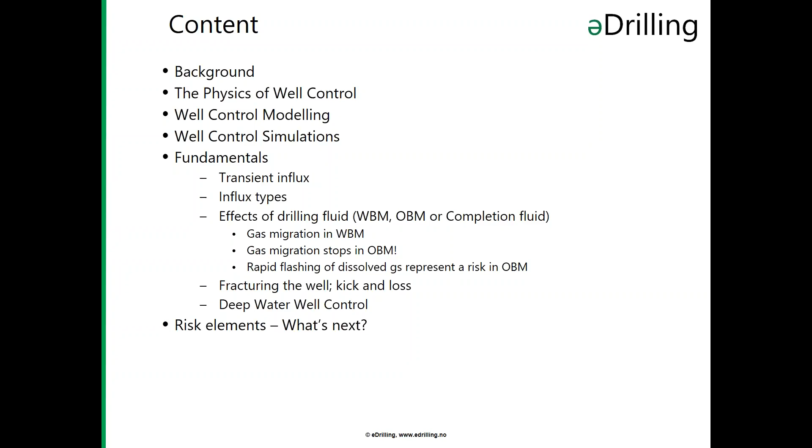As a background to this webinar, here we can see the technology knowledge which is inherent in our company and in the personnel working here. We've been involved in well control since 1983, with a focus on gas kick development to understand, describe and model this. There was also a specific focus on kick development in oil-based muds.

The industry has also had a high focus on this, and a number of joint industry projects were organized to focus on and understand kick developments, with a lot of full-scale well experiments performed. I'll mention some of these here.

In 1989 there was a JIP to focus on kick developments in inclined and vertical well experiments, gas migration and control in these. In 1991 there was another JIP focused on drilling high pressure, high temperature wells, and field tests both in oil-based and water-based mud were performed in the North Sea with focus on well hydraulics, temperature development and pressure control.

Extended reach wells were studied in large-scale kick experiments in a large-scale surface well, or flow loop, in 1995. In 1998 there was a JIP focusing on development of underbalanced drilling.

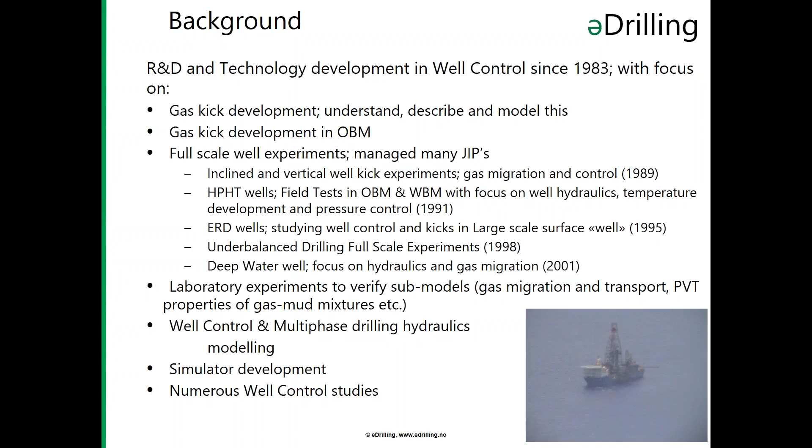I'll give a brief overview of the flow hydraulics model which is utilized. This is an advanced transient single and two-phase hydraulics model, which is coupled to a transient two-dimensional temperature model. By means of this model, it's possible today to focus on the challenges in drilling, completion, well intervention and production operation related to hydraulics and well control.

It's possible to perform integrated design of operations. This modeling has also been linked to advanced training simulators, and it's also integrated with real-time systems, making it possible to perform post-analysis. The model is designed to be very flexible, robust and fast, and can handle complex situations.

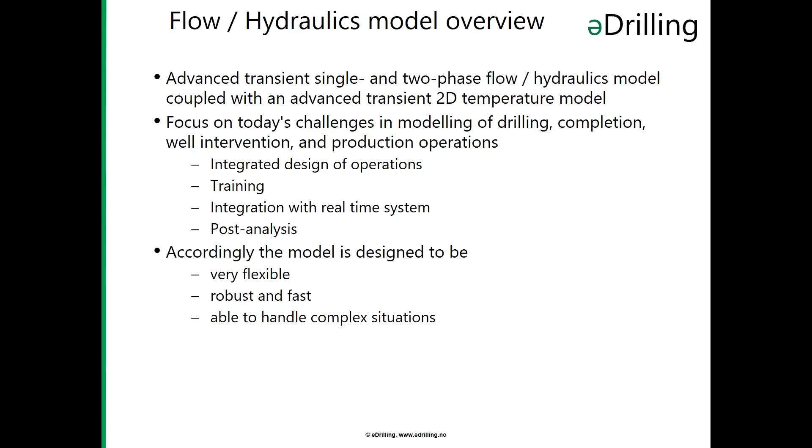In single phase, the transient flow and heat transfer model handles sequences of different fluids, density changes, pump rate changes and stops, and transient temperature effects of all these.

During drilling, it handles the flow of cuttings with slip. During tripping, it models surge and swab, compression, acceleration, and the elasticity of the drilling mud. And during pump startup, the breaking of the gels is taken care of.

The fluid properties are modeled according to the pressure and temperature in the wellbore. When utilizing the model, it's also possible to calibrate the key parameters to match available data, like friction factors, rheology parameters, and heat transfer properties.

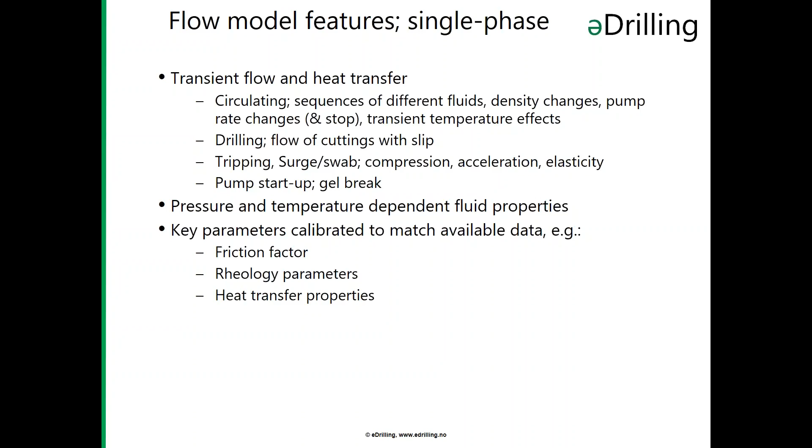The governing equations comprise the conservation of mass of each fluid component and the conservation of total momentum for the system. A simplified set of these equations has been derived based on some assumptions: that all flow variables depend only on one spatial dimension, the flow along the flow line, and that the temperature at the start of the simulation is known and also depends only on one spatial coordinate. The gas can be dissolved in oil, but not in water, and the fluid can in general be composed of up to 5 different components like drilling mud, formation gas, formation oil, formation water, and formation cuttings.

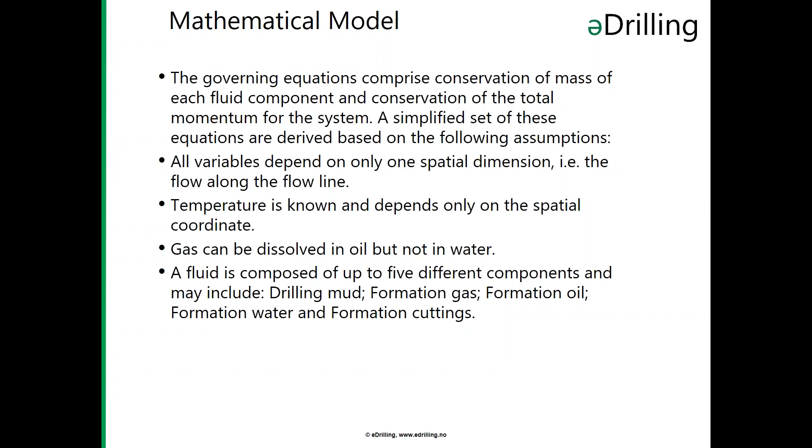The dynamic heat transfer model handles the heat transfer between the formation, the well, and the drill string. Changes in the drilling fluid temperature may result in significant changes in the fluid density, the active volume of the well, the frictional pressure losses, and it also has an impact on wellbore stability conditions in the wellbore.

One important aspect related to well control is that temperature effects may cause other effects to appear when they are not actually present, and they can also cause temperature effects to mask some important effects when these are present, so that you don't see important well control signs from the wellbore, for instance.

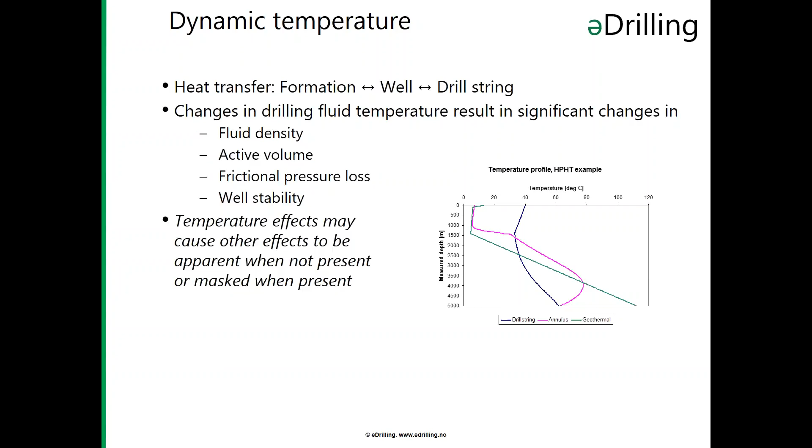The dynamic temperature is closely linked to the mass transport model, and there is a coupling between these. It's called every computational time step, and it updates the temperature profile inside the running string and the annulus. Dynamic effects due to pump rate changes and string movements, both axial and rotational, are taken into account.

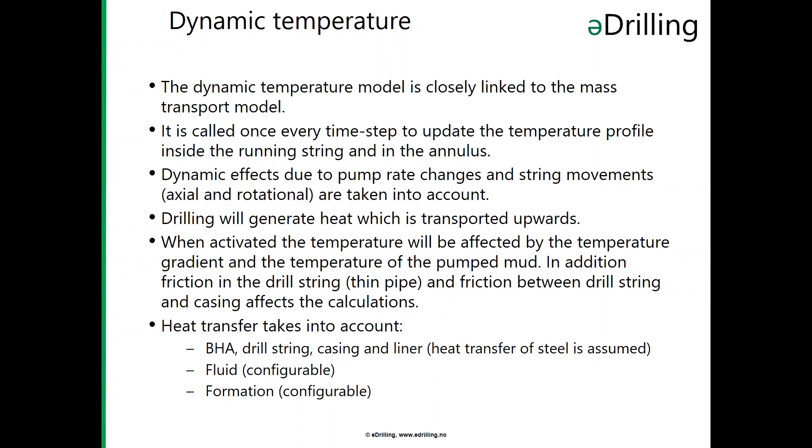Drilling will generate heat, and this is transported upwards. When the temperature model is activated, the temperature will be affected by the temperature gradient and the temperature of the pumped mud. In addition, friction in the drill string and friction between the drill string and casing will affect the calculations. So heat transfer takes into account the bottom hole assembly, drill string, casing and liner, the fluids, and the formation.

In a well-control situation, we model the reservoir with a dynamic reservoir influx model. The flow model simulates the interaction between the well and the reservoir, and during drilling the well is continuously extended according to the rate of penetration. When the drill bit penetrates into a porous reservoir, the difference between the wellbore pressure and the formation pressure will regulate if a flow from the reservoir formation fluids is initiated and a kick is started.

If the pore pressure is higher than the well pressure, a flow will start. The influx rate depends on the pressure difference between the wellbore and the formation, the length of the reservoir exposed to the wellbore, and the properties of the reservoir like permeability and porosity.

If drilling continues, the reservoir length exposed to the well will increase, and this is used to simulate a drilled kick. If a porous reservoir has been penetrated and then the well pressure falls below the pore or reservoir pressure, a kick will start due to the same process. But in this case, the reservoir length will not change, since the drill bit is below the reservoir zone.

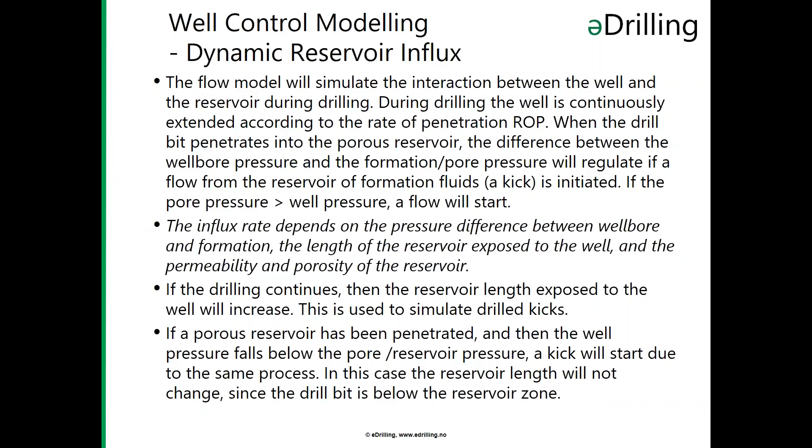The mud composition is modeled in detail. It handles multiple fluids. The density is modeled as a function of pressure, temperature, and fluid component, and the same with rheology. The thermophysical properties of the system are modeled. The cuttings transport, with focus on the slip, is handled, and the flow out of the model is handled.

When we have a kick, the dynamic influx from the reservoir, as I mentioned, is handled. The gas can dissolve in the oil-based mud. We can also model loss to the formation. In the vertical part, the phase or PVT properties of the mixture are handled in detail, and also when we have free gas and drilling mud, the multiphase flow is modeled.

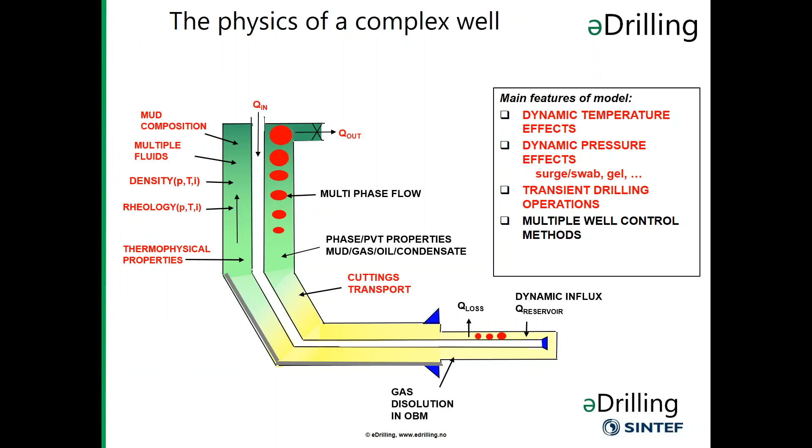There are some elements which are not part of the model used for evaluation, but they can also be added in specific studies, like particle sagging, diffusion into the wellbore, and hydrate formation.

So to summarize, all this modeling makes it possible to handle the dynamic temperature effects, dynamic pressure effects, the effects of transient drilling operations, and also the effects of various well-control methods.

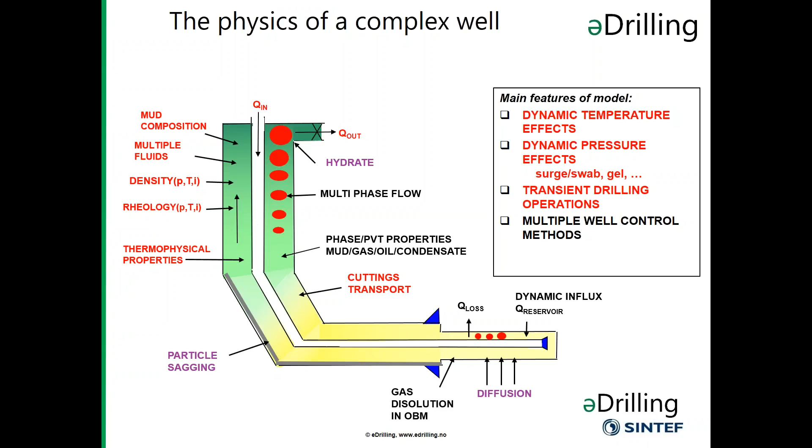This summarizes some dynamic effects which are handled in the model. It handles compression and decompression of fluids versus pressure losses, fluid displacements, and it moves fluids through the system. It handles the two phases, either liquid-gas or liquid-cuttings, and continuous change of operational parameters. The temperature profile is updated in the modeling.

The model is coupled to topside when it deals with training, and this combined model is very complex for managed pressure drilling or dual gradient drilling.

The density is a function of temperature, pressure and composition, and the same with rheology. Rheology is also a function of the flow velocity. We utilize the three-parameter rheology model to model the rheology.

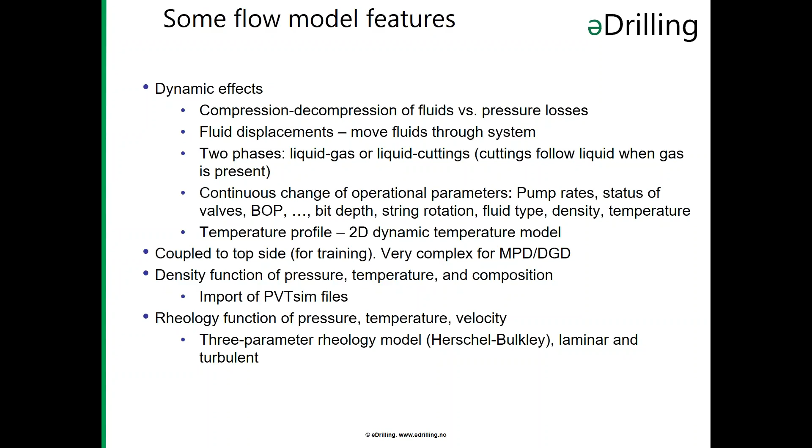Furthermore, on the phase properties, after an influx in a well, mixing will take place between the mud and the influx. In general, hydrocarbon influxes can range from dry gas through volatile oil to condensate and heavy oil. Hydrocarbon gas solubility in the oil phase of the drilling fluid is several orders of magnitude larger than in the water phase, and we assume that the solubility in water is zero in the modeling.

After an influx, the mixture conditions of the mud and influx will move towards thermodynamic equilibrium, and this condition will depend on the pressure and temperature in the wellbore.

Some influx will dissolve in the mud when you have oil-based mud, and this will dissolve in the base oil. In general, the dissolution process is not instantaneous, but we assume it to be in the modeling.

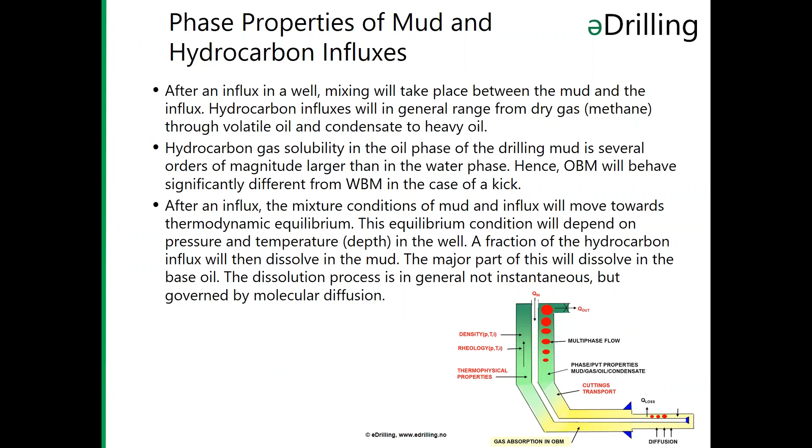Now we will focus a little bit more on the difference between influx in oil-based mud and water-based mud. Dry gas influx is soluble in the base oil, and the bubble point of the mixture will govern where the flashing of the free gas will take place in the well.

Gas or volatile oil in oil-based mud will have the following special characteristics. As long as the influx is dissolved, it will stay rather concentrated. The influx will not be distributed over a larger portion of the mud by slippage, and a high gas peak can be expected when the gas reaches the surface.

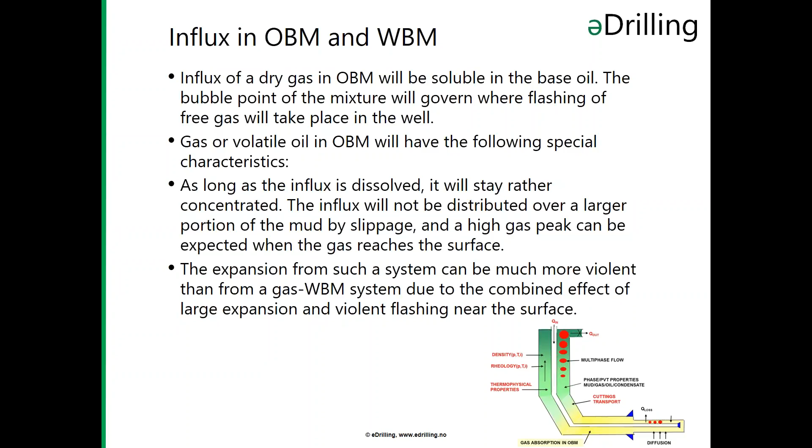The expansion from such a system can be much more violent than from a gas-water-based mud system, due to the combined effect of the large expansion and the violent flashing near the surface.

The volume of gas influx changes when it goes into solution. In general, the volume of the gas influx will shrink when the gas molecules move from the free to the dissolved state. This effect is reduced with increasing pressure.

An influx of volatile oil in water-based mud will release free gas when it is pumped upwards in the well due to the pressure reduction, and the free gas will expand according to the real gas law.

Influx of volatile oil in oil-based mud will mix totally with the base oil, and a new pseudo-base oil with different PVT properties than the volatile oil will be created, and the bubble point and volume of free gas released will then be different from that of the volatile oil alone.

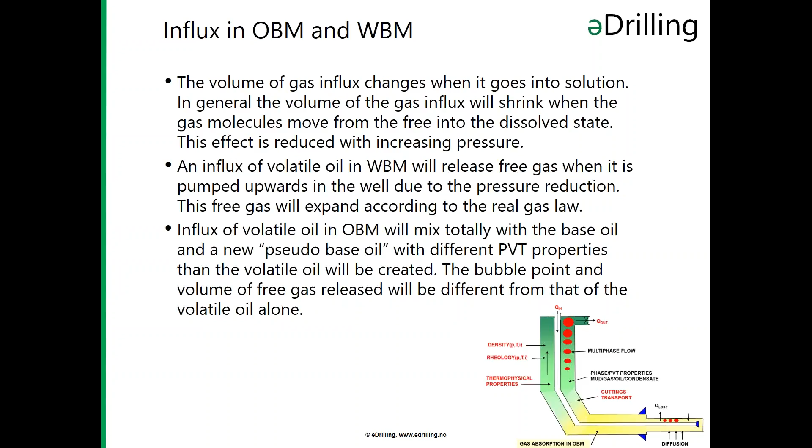The expansion of gas in oil-based mud, as I mentioned, can be much more violent than that from a gas-water-based mud system due to the combined effect of large expansion and violent flashing.

The influx was not detected until it was too late.

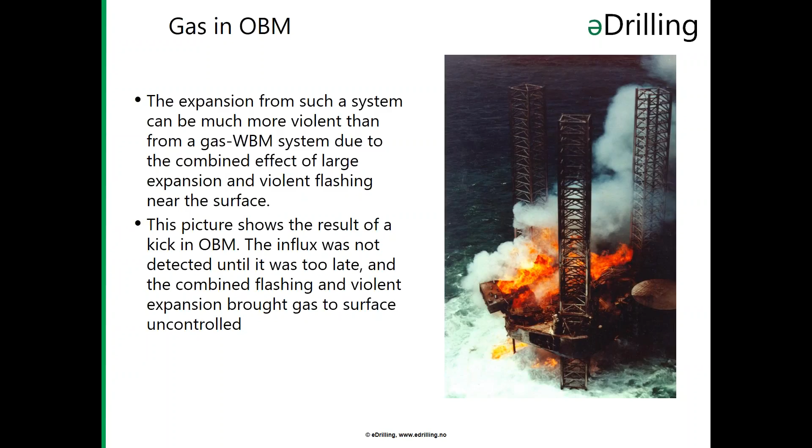Okay, so now we will run a simulation of influx in oil-based mud. This is us drilling the 8.5 inch section. I will just start the simulation as I talk. So we are drilling the 8.5 section.

We have a water depth of 84 meters, and we are drilling into a reservoir and getting an influx. So now we are entering the reservoir, and you will see on the pink line here that you are getting a larger flow return.

And also here we model the pit gain and also the influx down here. So now we have shut in the well, and we are waiting to get a stable wellhead pressure before we start circulating the influx out.

In this simulation, we are going to do a driller's method. So we are going to circulate the influx out as long as, just when this wellhead pressure is stable.

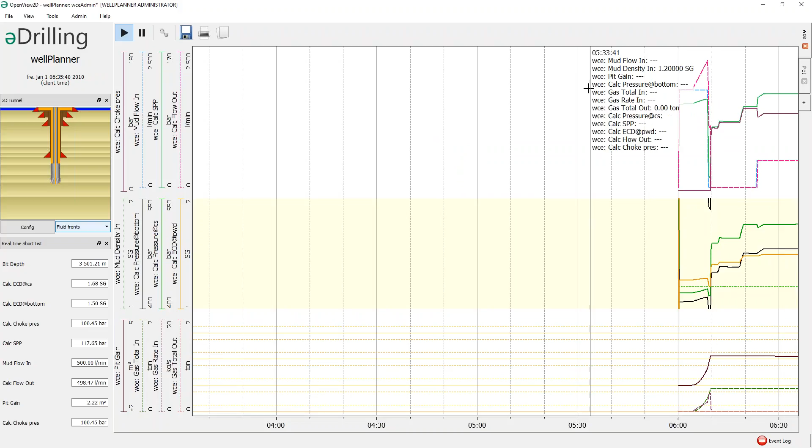Now we are pumping it out, and you can see we are keeping our bottom hole pressure constant, but also the other pressures in the well. As soon as we will be able to see the gas travel up in the annulus in the small drawing here on the side, so you can follow the position of the gas influx.

So now we are moving upwards to the casing, and we can have a look again. So we still have it all dissolved into the mud. Still.

So to not spend too much time on the simulation, because we will show a couple more things afterwards as well. So when the model calculates the kill mud weight itself, when it starts circulating out, when the gas is out of the well, it will start pumping the kill mud at the proper mud weight.

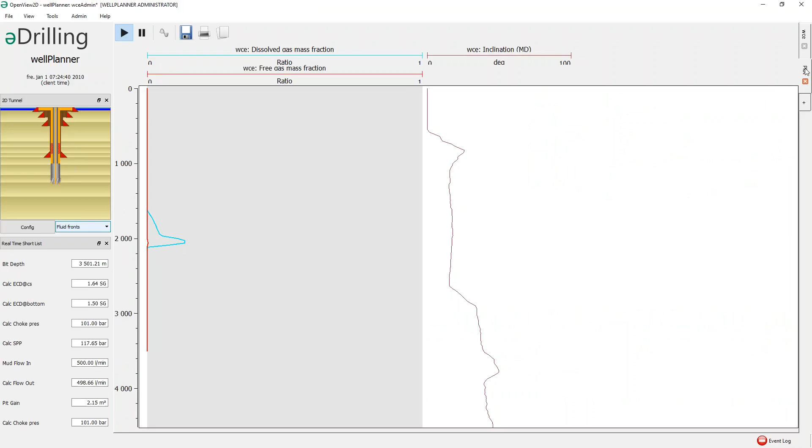Now you can see that when the gas is traveling past the casing shoe, you can also see the casing shoe pressure is dropping, due to the mud being lighter because of the gas dissolved into it. So we don't see any flashing of gas out of the drilling mud yet, but it's traveling upwards.

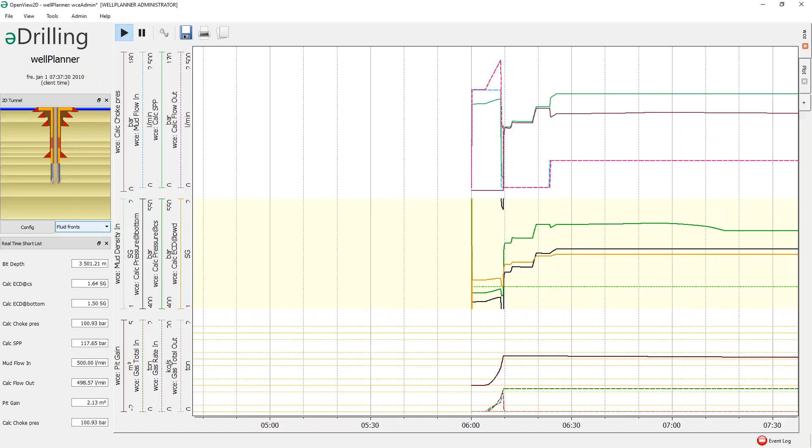Yeah, so we have spent a lot of time now, so I think we will just go to the next slide, and we will show a bit more simulations afterwards with more details, for example on the travel of the gas. So just go to the next slide.

Gas migration is very important during well control, and it's a key parameter. In general, the flow of mixtures of mud and hydrocarbons is a very complex and transient multi-phase flow process. And the free gas will travel either in the bubble or the slug flow regime.

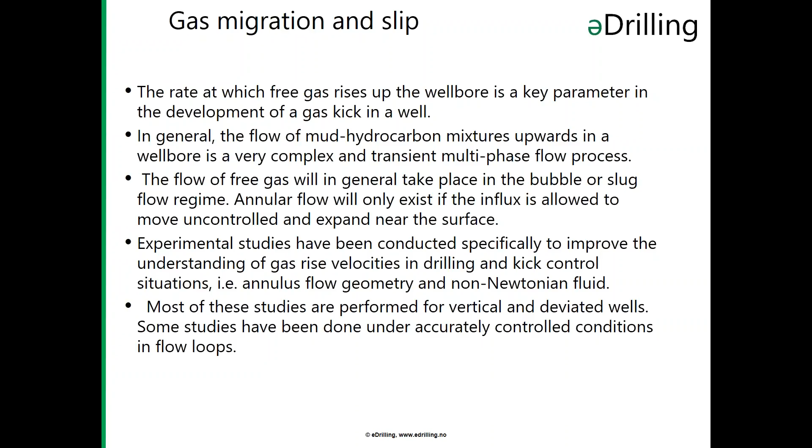A lot of studies and experiments have been conducted to improve the understanding of the gas rise velocities and develop correlations in detail. Some of these have also been done under accurately controlled conditions in flow loops. Also, full-scale tests and experiments in vertical and inclined wells have been performed.

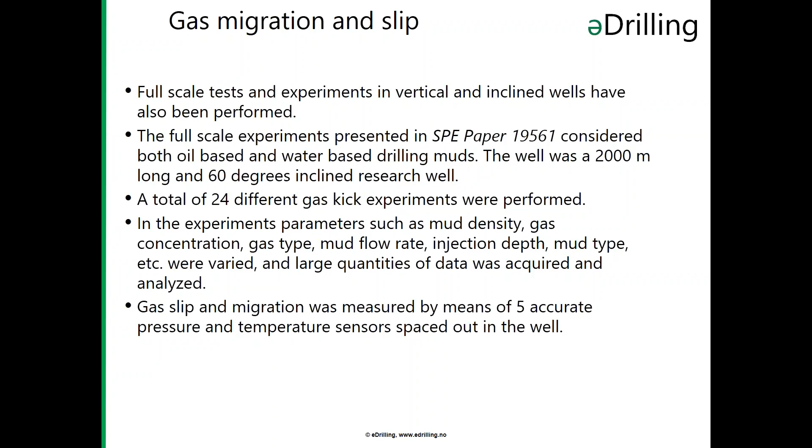One of the JIPs I mentioned is documented in SPE paper 19561. In this case, a total of 24 gas kick experiments were performed, and parameters varied, such as mud density, gas concentration, gas type, mud flow rate, injection depth, mud type, etc. A lot of data was acquired and analyzed. Gas slip and migration was measured by 5 pressure and temperature sensors spaced out in the well.

When does the transition between bubble and slug flow take place? It seems we have seen that there is a difference between Newtonian fluids and non-Newtonian fluids. The transition in Newtonian fluids is at approximately 25% gas, but in non-Newtonian fluids it is at less than 5%. This is important to take into consideration when modeling, because the slug flow regime gives a higher gas slip velocity than the dispersed bubble regime. And the slip models have been correlated to the experiments, both small and large scale.

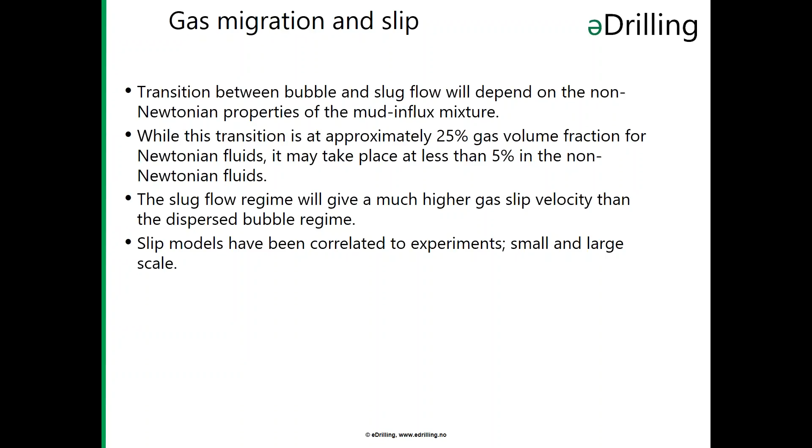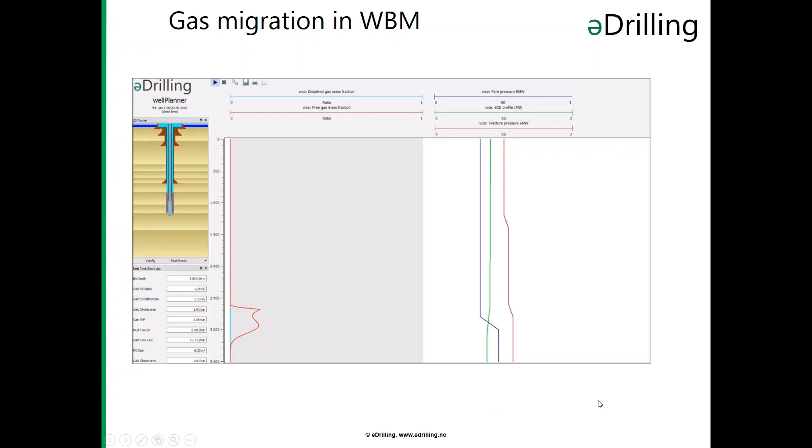Okay, and then we will show the gas migration in a water-based mud. I will start this small video. As you see, we have already taken free gas into the well, and we are doing a flow check, so we are not doing anything, we are just standing still. You can see the gas migrates upwards into the well because it's free gas. I think we will just let it migrate all the way up to the choke line.

So if we go to the next one, we have the gas migration in oil-based mud. This is the exact same well with the same parameters. The only difference is that we have an oil-based mud instead of a water-based mud. And as you see, we have the dissolved gas going into solution, but you have some free gas because the fluid is kind of full of gas. So the free gas is traveling upwards, but it goes into solution on the way up.

And the free gas comes into so-called virgin mud, which does not contain any gas beforehand. So now you see that all the gas is in solution, and it's not migrating anymore. So you actually have captured the gas into the fluid, and you have a good control of what's happening there.

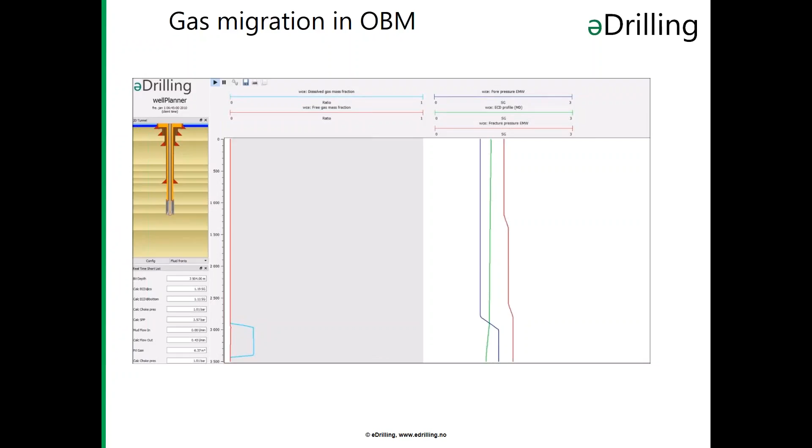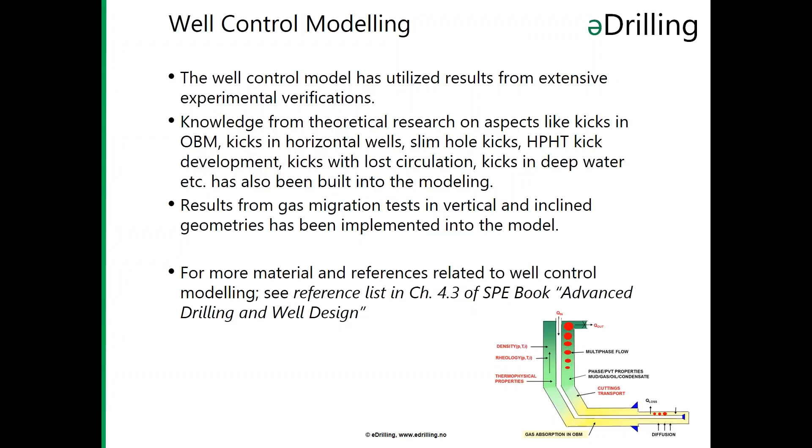The well control model, which I've seen some examples of being used here, have utilized all these experimental results and the knowledge from theoretical research also. If you need more details regarding well control modeling, there is a long reference list in the SPE book Advanced Drilling and Well Design, chapter 4.3.

Regarding other well control risks, what we have done here so far is just to scratch the surface of well control and the risk related to that. There are a number of other issues which we have not dealt with, like the effect of gas dissolution on the viscosity and cuttings carrying capacity, the settling of barite. We have not looked into the fracturing of the well, both combined kicks and losses, secondary kicks, and deep water well control is an issue which we will have a short look into in a minute.

Challenges in deep water well control are pressure losses in long choke and kill lines. What happens if the gas passes the BOP and into the riser undetected? If you have gas migration or not in long risers, and if the gas is trapped in gelled muds. Also, there are a lot of challenges and risks related to dual gradient drilling, high pressure high temperature wells, and also completion operations, because a number of kick incidents take place in completion operations.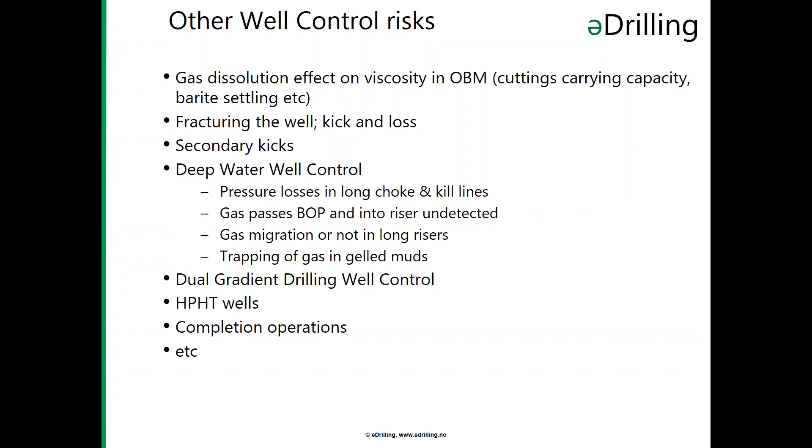So we're going to do another recorded simulation that we have done here. So what we are looking at here is that we are also drilling an 8.5-inch well. We have taken an influx, and it's mostly dissolved gas. As you see here, it's a deep water well, almost 1,000 meters of water depth before the well.

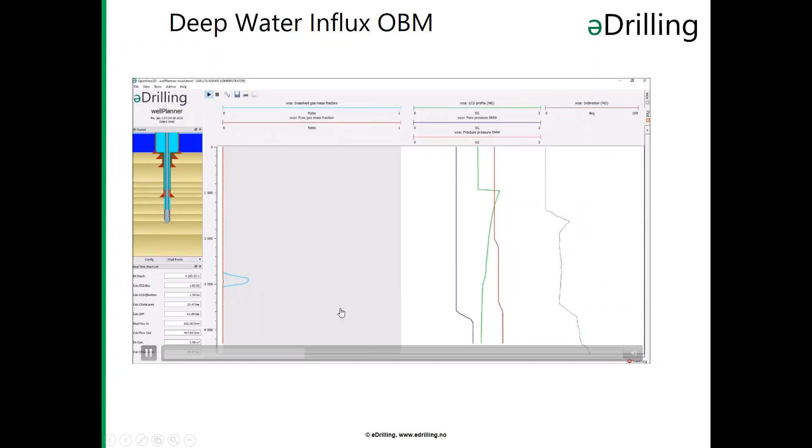So now we are starting to circulate the influx upwards, and you can see it travels upward. This is edited a bit, so it's a bit quicker than it would be in a real simulation. You can see it travels up here into the casing, and you saw also when it passed the casing shoe, the pressure on the casing shoe also dropped.

So what we will see now, when we get closer to the surface, you will see we get some more free gas before it's entering into the choke line. So what we saw here is that you had an increase in your choke pressure as the gas exited the well, and you saw the drop in the mud return, but you also saw down here that your gas exited the well.

So now we have emptied the well of gas, and this is also the driller's method, so here we also weight up and started pumping the heavy fluid, the kill mud. You see a drop in your standpipe pressure as we are pumping down the string, and here you saw that the kill mud entered the well, and you saw that we then got a stable standpipe pressure, but your choke pressure then started regulating to maintain a proper pressure.

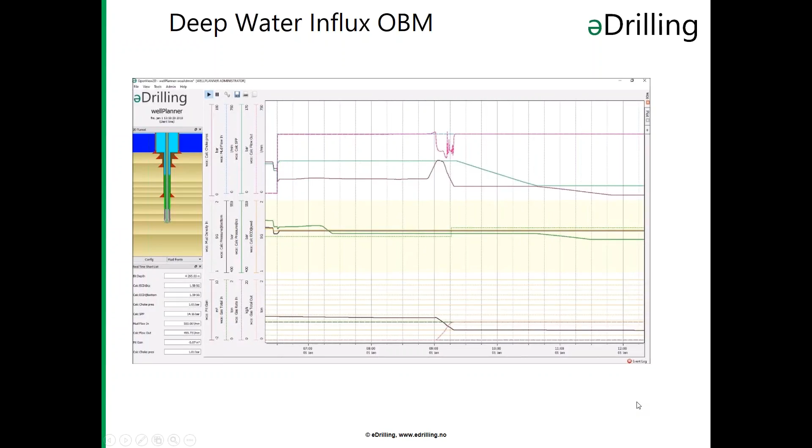So we see we'll start getting a choke pressure building up, but at the same time the gas in the riser is migrating and exiting the well. And here you see the rapid pit gain that we get due to what's coming up into the riser, and here you also see the gas going out of the well.

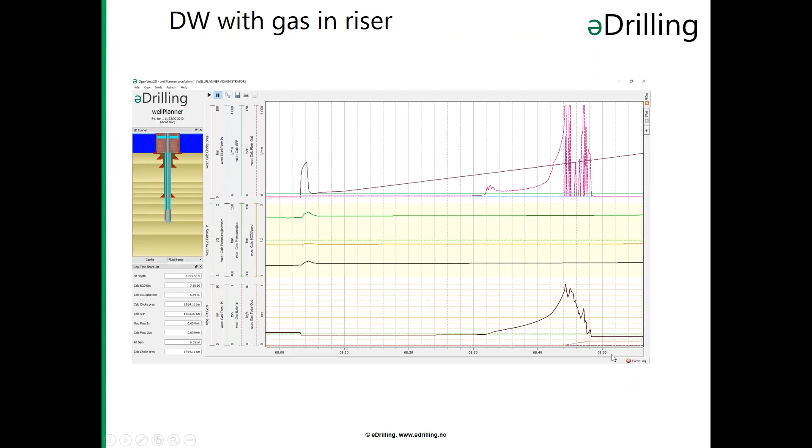More on gas migration, the question of undetected kicks, especially dangerous in oil-based mud. Kill methods, what is the optimum kill method? And also the surface flow parameters, the limitation of the mud gas separator, can it handle the kick? And when do you expect gas at surface?

How is the kick behaving in brine or water-based mud versus in oil-based mud? There's a lot of complexity when you drill high pressure, high temperature wells, and well control is a key element in preparing for these wells. Deep water drilling we saw, and also in general wells with very narrow drilling windows. So some of these issues we will address in the next webinar.